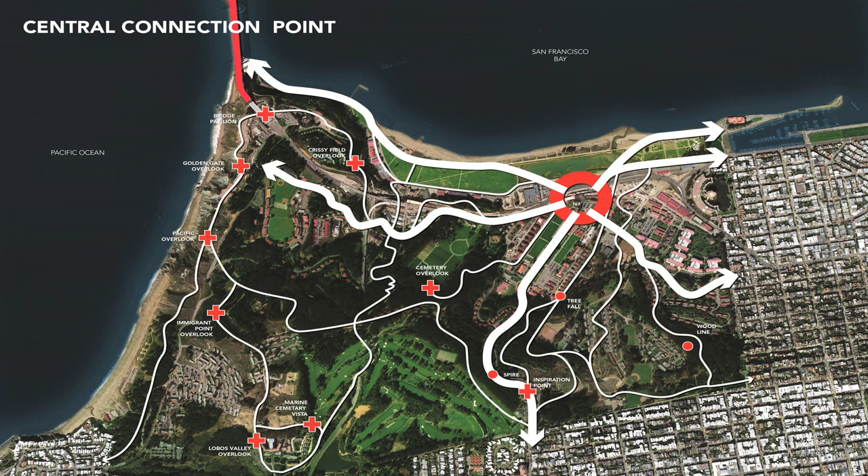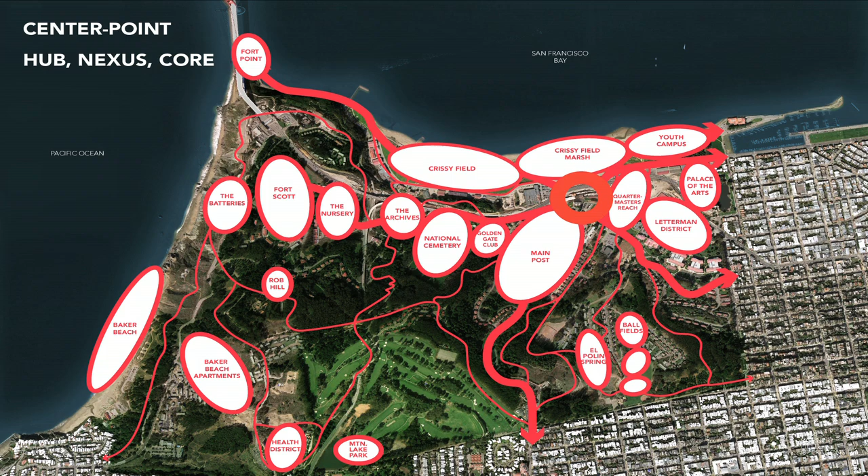It's a very poetic site, it's a guardian, it's a gateway, and it's a center point. It's also a significant viewpoint, and an important connection point. This little map shows the importance of this location connecting east and west paths across the Presidio grounds, Crissy Field, Crissy Marsh, and Bayfront lands, and the importance of the north-south connection, connecting Presidio Hills, Inspiration Point, down along Anza Esplanade, and drawing it down to Crissy Field Marsh and the Bay. As a center point, it's also an important nexus or hub to connect and integrate and make all of this special. So because of its role as a viewpoint and a center point, we call this Presidio Point.

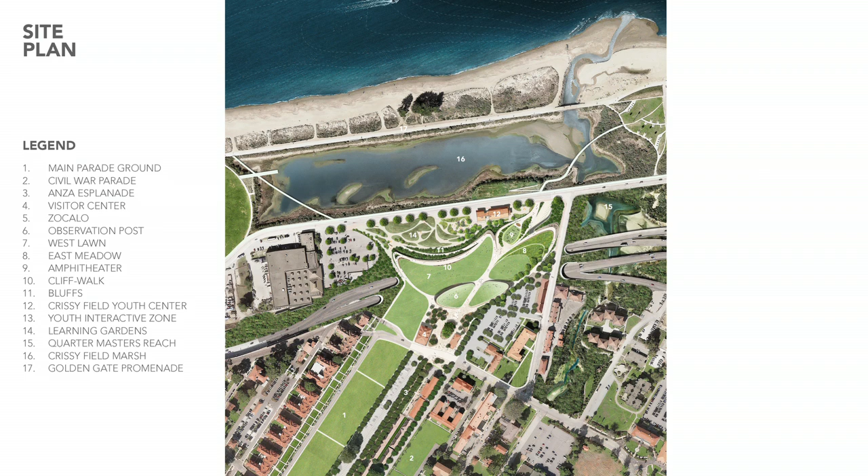We're playing a little bit on the romance of points in San Francisco. You have Fort Point and Vista Point, and now you'll have Presidio Point. This is the site plan. I'll walk you through it less in terms of places and more in terms of six organizing principles.

The first is to open the views, to preserve the views. When you stand in this location over the tunnels, we imagine you'll be able to turn 360 degrees and see the skyline, the Palace of the Arts, Alcatraz, Angel Island, the bridge, the hills and forests and woodlands at the back, and the parade ground and the main post, all in one panoramic view. We think this is extraordinary and unheralded, something any design has to really play on and leverage.

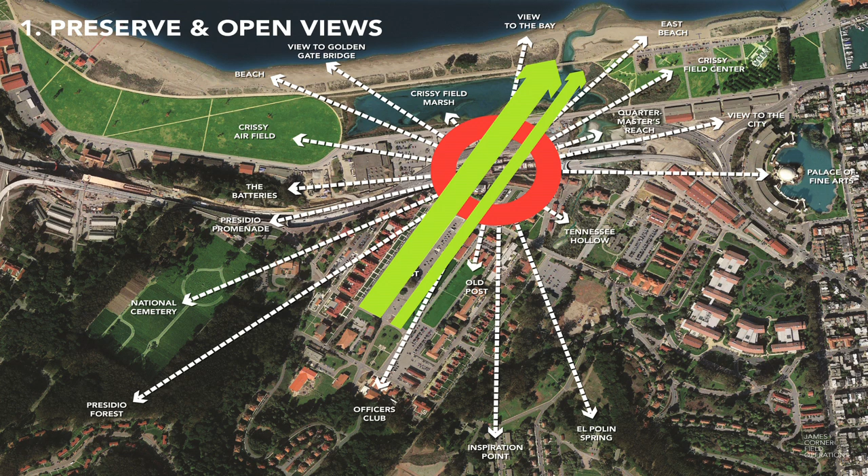Towards that end, you'll see the two green lines on the plan. We extend the parade ground all the way out, with absolutely unobstructed views. But importantly, the Esplanade connects the hills to the parade ground and the main post, brings you through Presidio Point, down to Crissy Marsh, and down to the Bay.

This aerial view shows the general expression of the Presidio parade ground being simply drawn out over the space of the tunnels. The lawn of the parade ground becomes the lawn of now what we call the West Lawn.

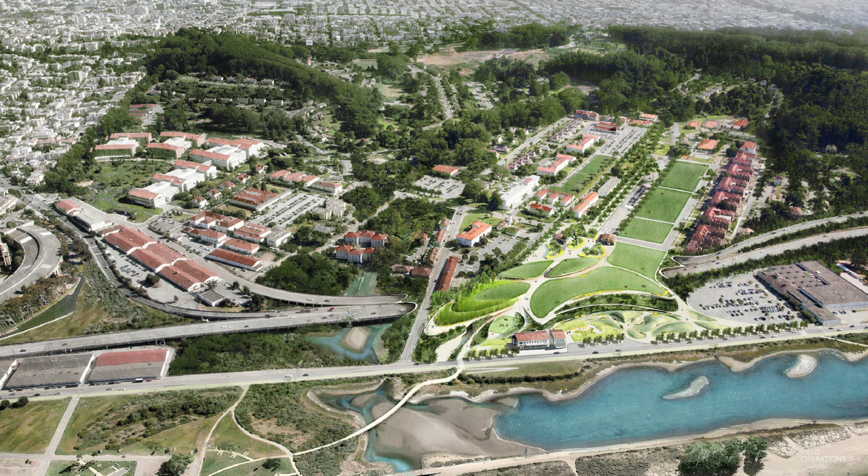These promontories form a series of important overlooks and vista locations. The two promontories look out, but from Crissy Field, you look up and see the promontories as invitations to come up. Here you see the main parade ground and the idea of just extending that carpeted lawn all the way out to the edge of the bluff, a completely open horizon. It will look a little bit like an infinity pool.

When you come out onto what we call the West Lawn, it's just a very gently crowned landscape, with simple open horizon lines to the sky, to the weather, to the view.

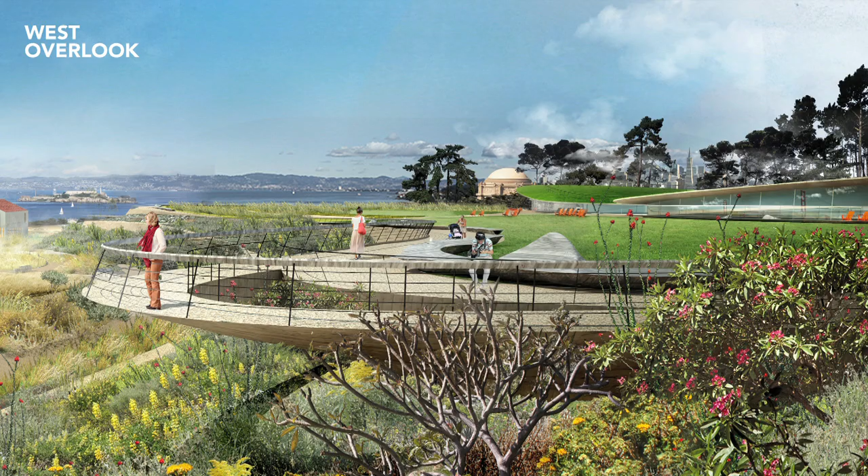This is the West Overlook. It's on the westernmost promontory of the site plan, designed as a cantilevered walk. Step out into the space of the bay, focus your views to the bridge and to the gateway, and have all of that atmosphere and air and weather moving around you, experiencing something about the real raw nature of this place on this balcony overlook.

The central overlook we call the looking glass. This is an idea to create a sort of glass, a polished stainless steel mirror. It actually builds on a 17th century landscape architectural tradition of using convex mirrors to look at a landscape and to paint it. So we like the idea of this as a feature, a destination element. When you sit on that bench and look inwards at the main post and the parade ground, and look at the looking glass, you will see the 360-degree view in one scope of view.

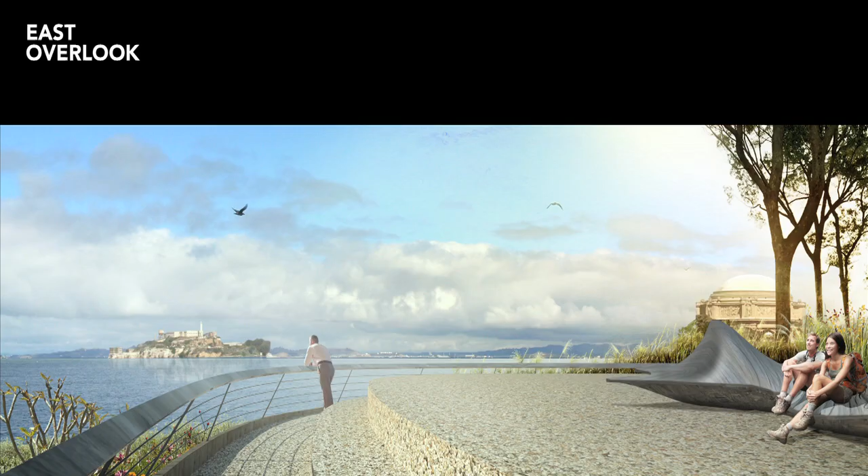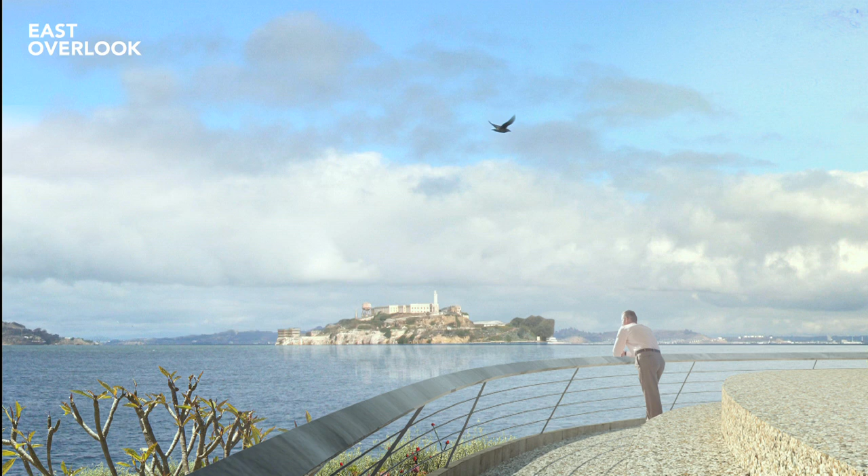The east overlook is focused on axis to Alcatraz. Notice how these get-down steps allow you to sit at a slightly lower elevation, helping you get out of the wind and out of the weather. But it also allows us to sink the railing so that from the lawn and from the elevated areas, you do not see the railing.

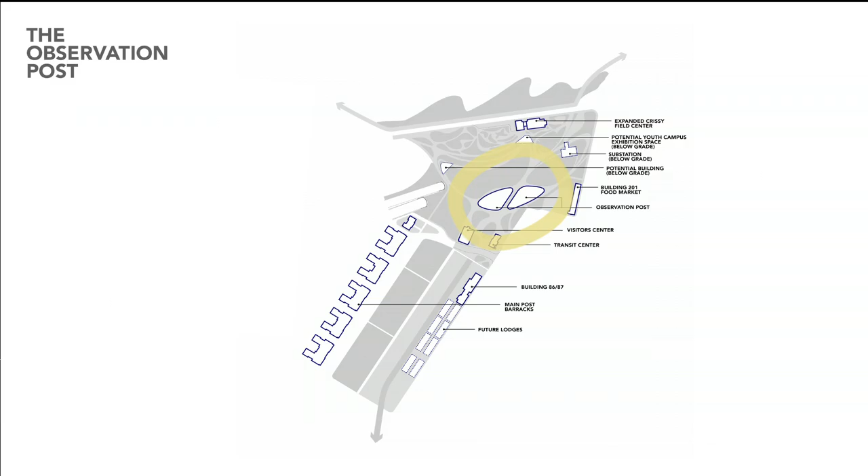In the middle is an area we call the observation post. It's a replacement for this building, allowing this building to be removed and actually opening up the view from the parade ground. This building is imagined as two sloping lawns that meet the ground. People can walk onto the lawns and go to the top, getting an elevated view all around. Underneath are two usable spaces for the Presidio.

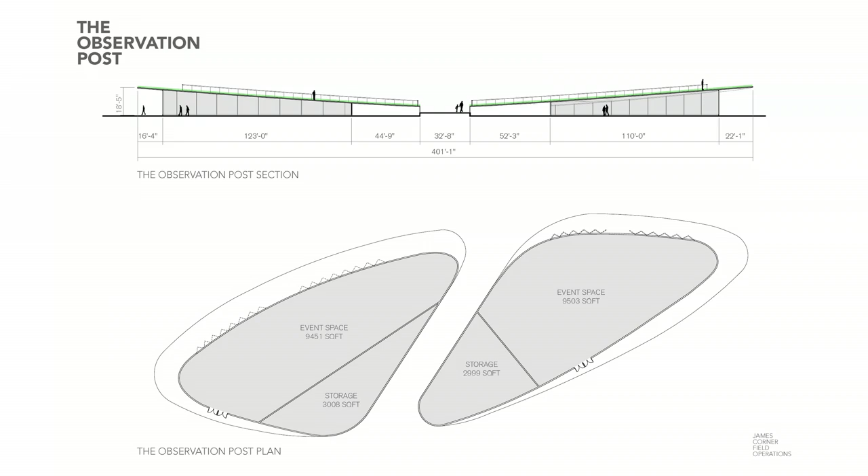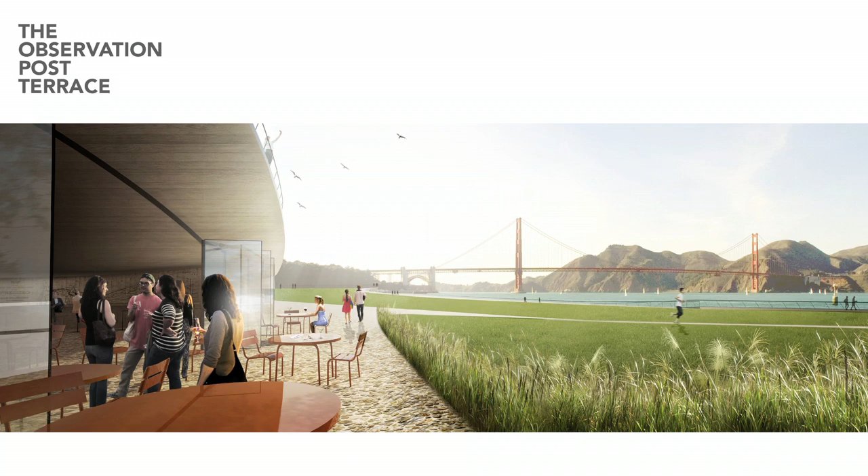About 9,000 square feet each. One might become a cafe and restaurant for dining, another might become an event space and a function space. When you come inside them, this wraparound glass facade allows for the full panorama to be framed between the roof and the floor. That glass wall can also slide open and close, allowing a lot more interaction between the inside of the building and the outside of the building.

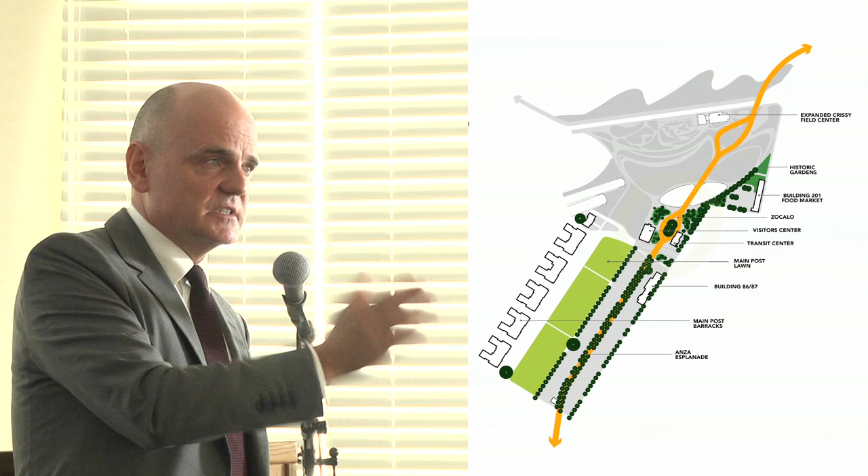The second important principle is connect and extend. Essentially, there are two components to that: one is Anza Esplanade, the other is what we call the cliff walk. When Anza Esplanade comes in between the visitor center and the transit center, we propose a new location around the Monterey cypress trees that are there today, and we call this the Zocalo.

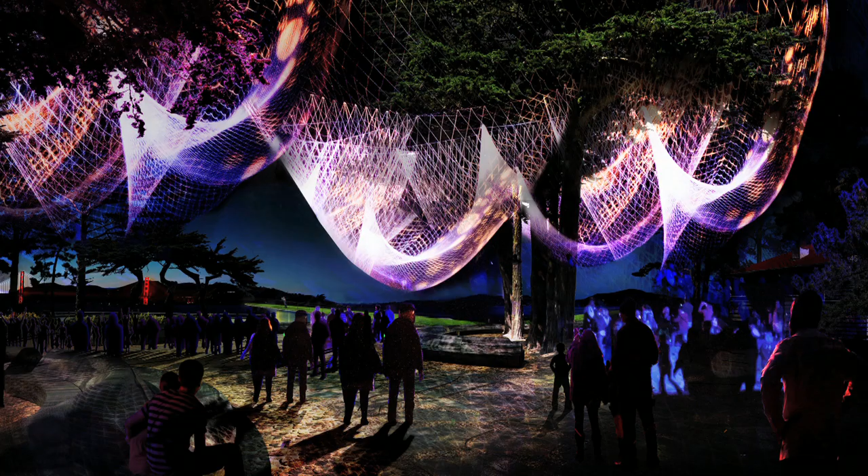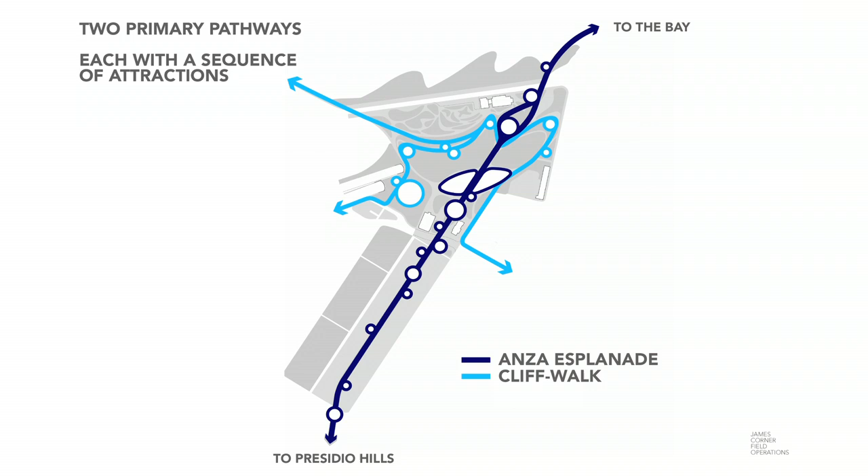The cliff walk connects down to Crissy Field, and it also connects the Presidio Promenade, and it draws people along the outer edge of the walk. This is where we want to have a lot of furniture, a lot of places where people are invited to

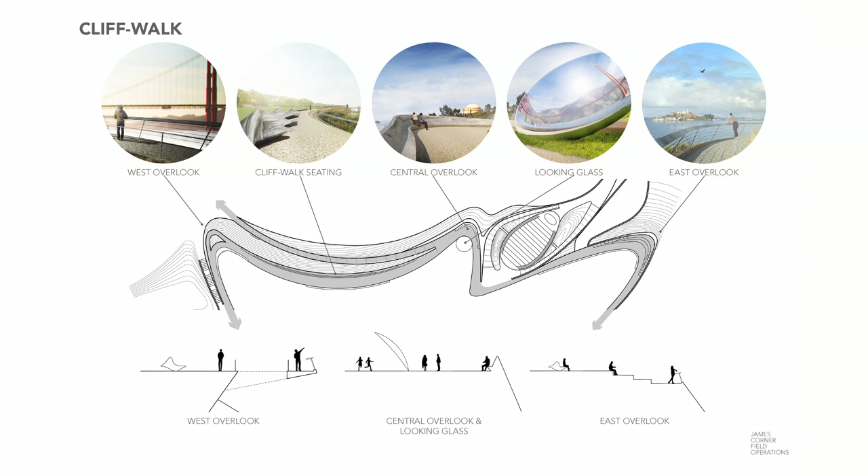sit, to take in the view. We have this idea of really sculpting furniture with backs that allow for wind protection and allow people to sit either looking into the Presidio or looking out to the view. And then the bluff walk is the ramp that takes you down the face of the bluff.

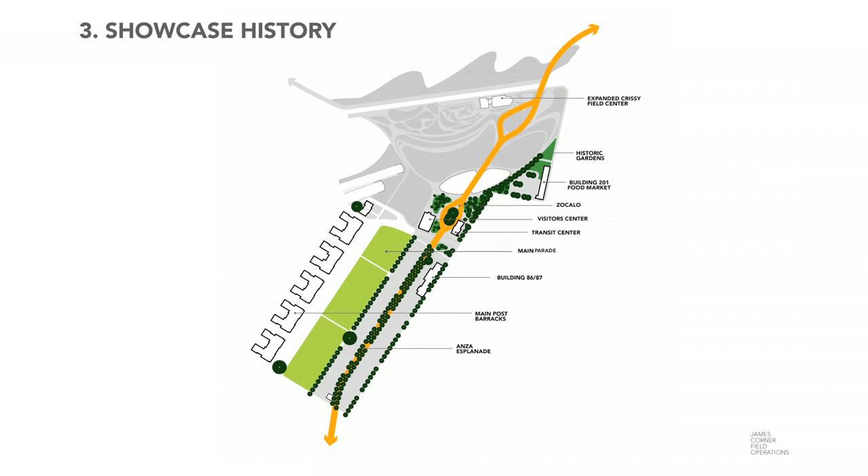It's user-friendly, it's wheelchair accessible, it moves gently and smoothly into the Crissy Field Marsh and across to Crissy Field itself. The third principle is showcase history. We're very reverent and respectful for the significance of the Presidio as a historical location, ranging from Native American peoples to the Spanish to people today.

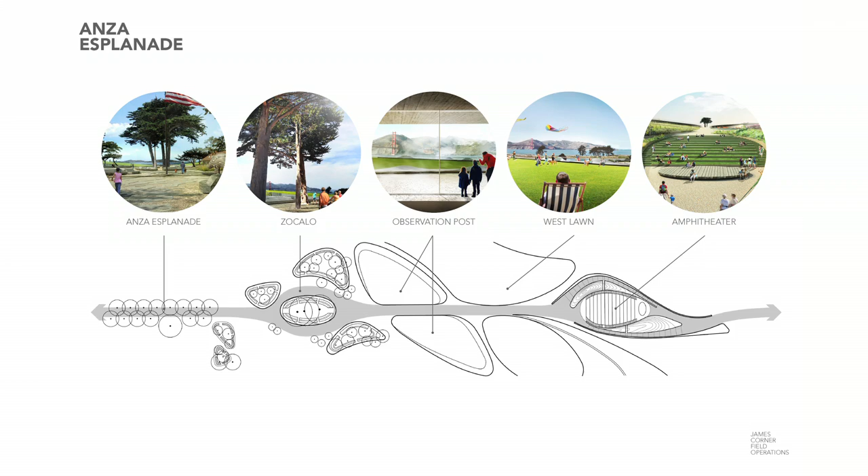We have an idea that Anza Esplanade will be the key route for people to take history tours. And as you walk along Anza Esplanade, you can begin to learn more about the place. We'd also like to have a huge flag in this location, a bigger than big American flag in recognition of the significance of the Presidio and its dedication to service.

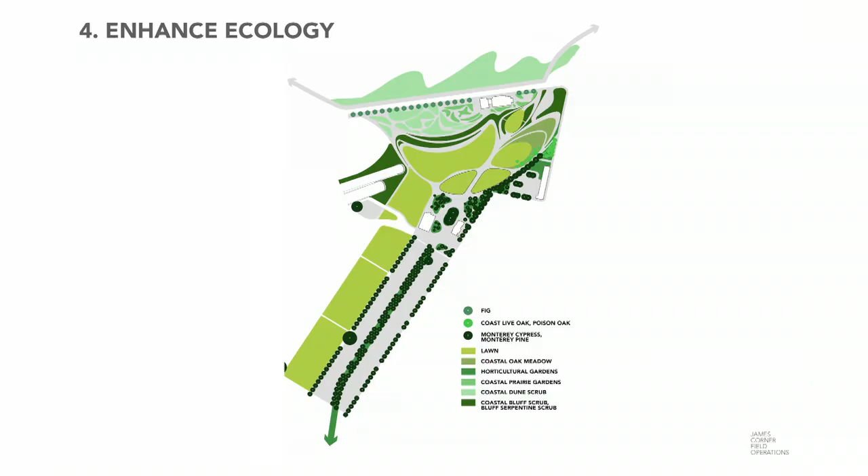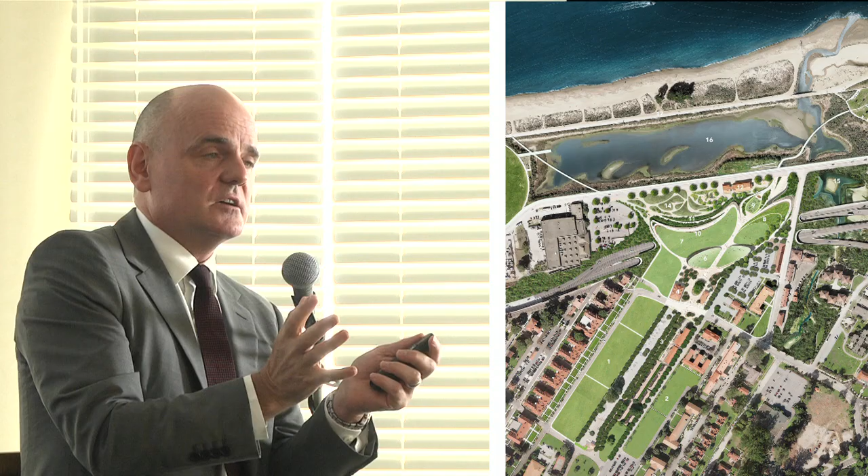The fourth principle is enhance ecology. Ecology works at various scales. We really applaud the reforestation program here, and we'd like to see that reforestation actually flank the sides of the Presidio coming down the Tennessee Hollow Restoration Project, and also on the other side, in an effort to make the Presidio a bigger void than it is today. So that the void effect of the lawns and all of those buildings are embraced by this large forest on both flanks.

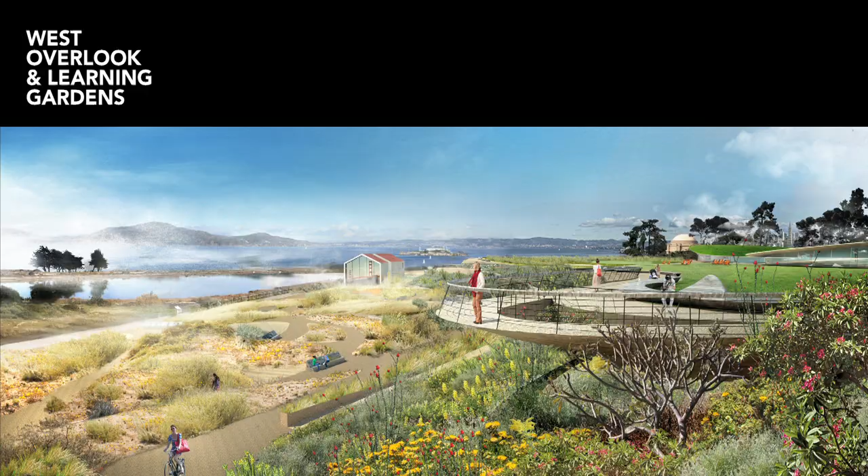This we want to be a sort of horticultural spectacle. Tall grasses blowing in the breeze, but as you walk through them, there are various horticultural moments to learn about native flora, in particular grasses, and their use in the recreation of meadows.

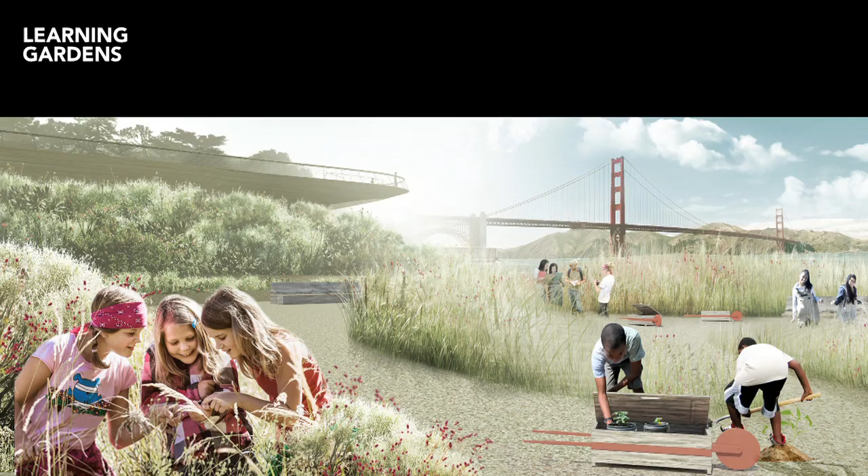The bluff walk, too, is seen as an ecological story with a series of plantings and wayfinding moments. And when you get to the bottom now, we're in the learning gardens, they call these the dune gardens, where youth, children, and families will come to learn about the environment, to learn about nature, which brings us to our fifth theme, invite play and learning.

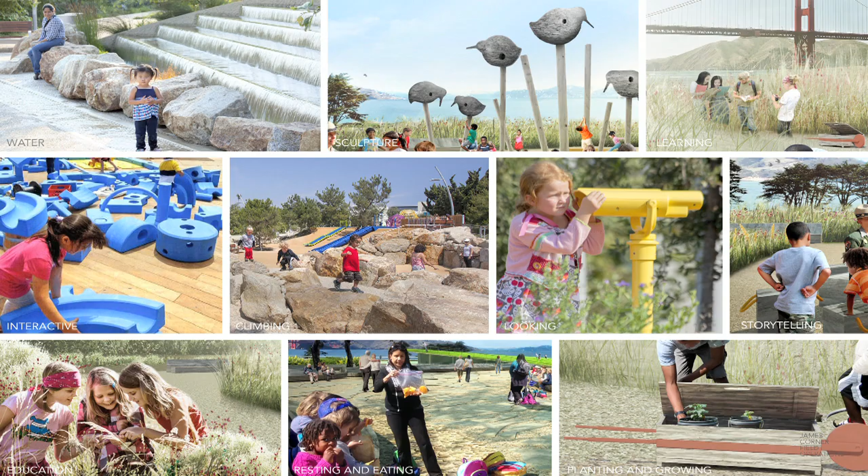In this lower landscape, we designed a series of hills and hollows and places of discovery. We have a series of outdoor classrooms in the Youth Interactive Zone, which is just by the Youth Center, where you can come and learn about composting, beekeeping, replanting of marshlands, and the cycles of the natural landscape. We also have an architectural plan to show the expansion of that center in a very sensitive way.

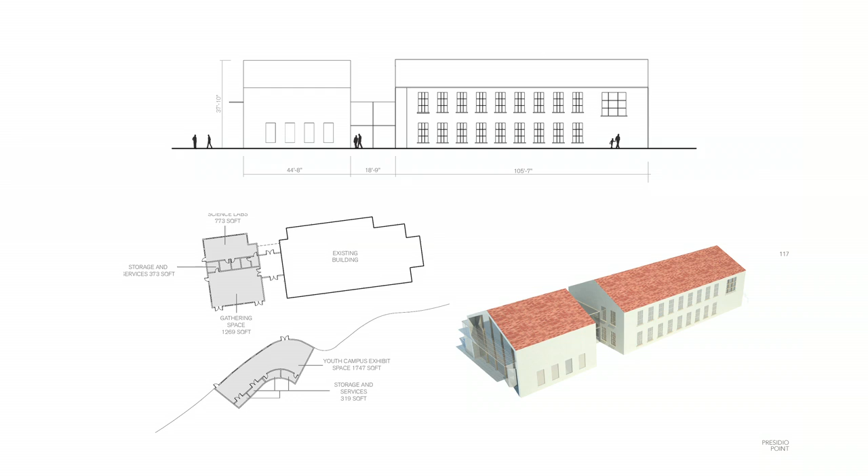We've created this idea, just like the bear, we have the snowy plovers that tells the story of the importance of these birds in this landscape and allows them to enter the imaginations of children and all who visit here. The possibilities down here too for what we call art in process, where artists can come and do something and be seen doing it. Interactivity, engagement, fun,

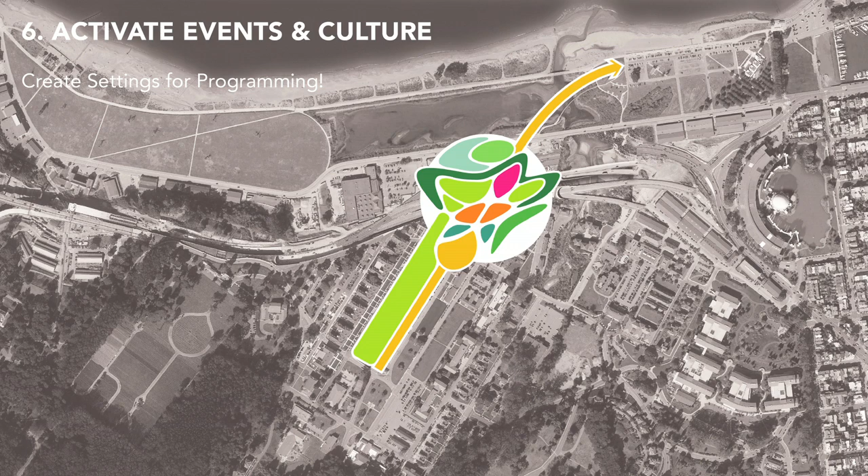communication about something about the importance of this as a wildlife corridor and as a historical destination. Finally, the sixth point, activate events and culture. You can see in this diagram with these colored islands, the idea of creating places that allow you and the community to program this place in a really vivid and exciting way.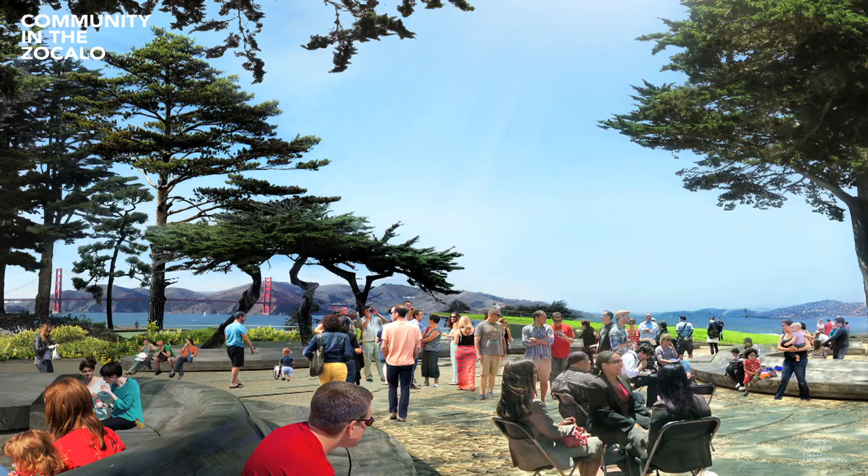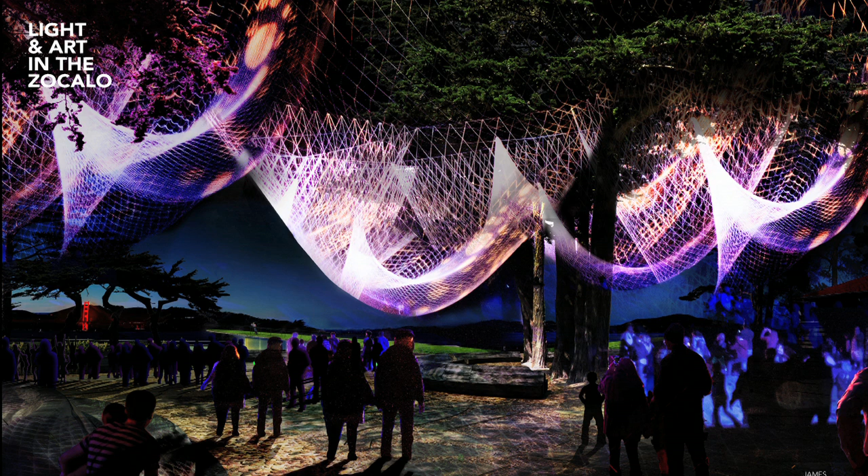In the Zocalo, for example, it is a place of gathering, orientation, community. It's also a place that could lend itself to food markets, to festivals, to the possibility of nighttime art or nighttime lighting on a temporary basis.

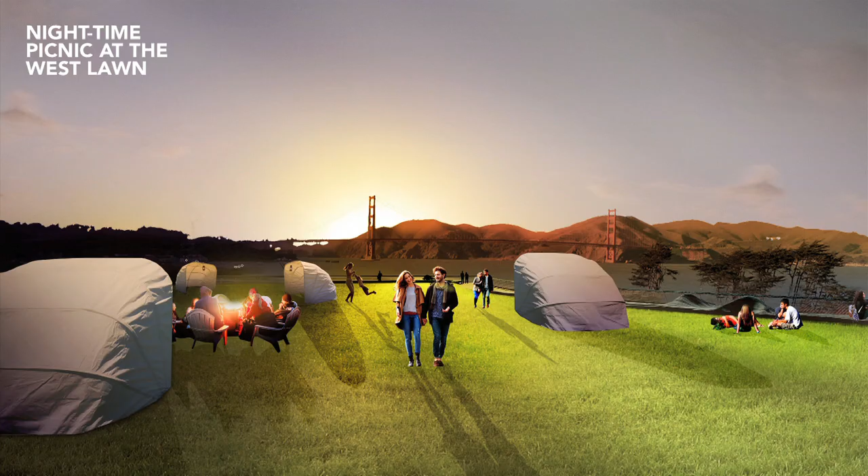On the West Lawn, we see it essentially about being for people, for frisbee, for kite flying, for deck chairs, but also the possibility of putting up small cabanas and having evening picnics and evening get-togethers, totem carving or log carving. We love the idea of camping and campfires, stargazing, possibility of a lantern festival or other types of community event where different peoples and different organizations can come and theatricalize what it means to be cultural and social in a natural place so close to a city.

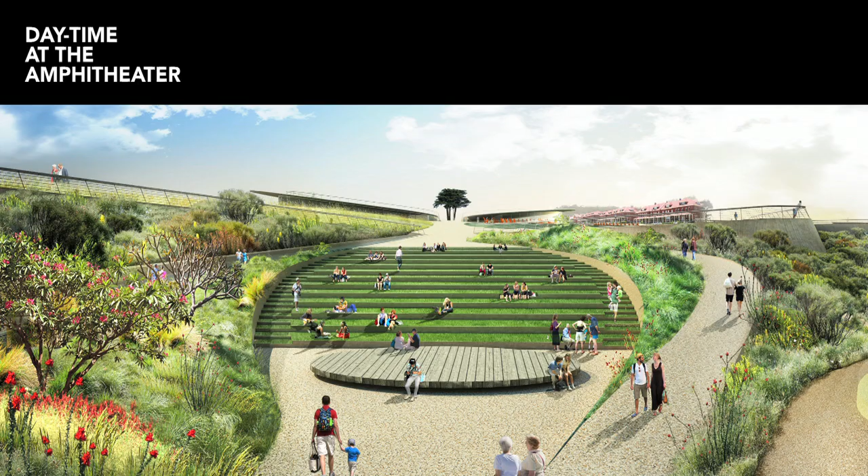The amphitheater is just a beautiful place to sit out of the wind, but it also lends itself to performance. It could be a really spectacular setting. Looking back up now, you see the observation post, the two lawns of the observation post, and the Monterey cypress trees now as an iconic sort of landmark.

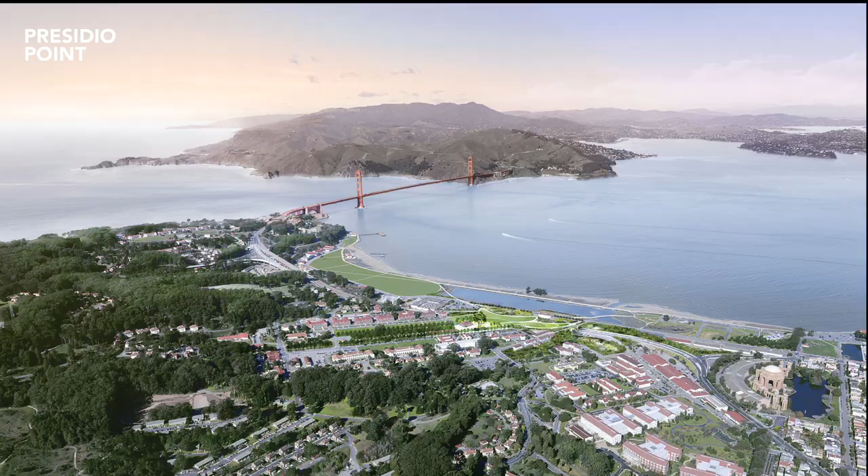The design that we've put into this shows the effort that we've put into trying to sculpt this place to make dramatic places on the one hand, and to make it seem like it's just a natural part of the bluff escarpment landscape on the other hand, in the context of the city. So it doesn't become about the design of this thing itself as much as it becomes about everything else around, adding up to something more than the sum of its parts.